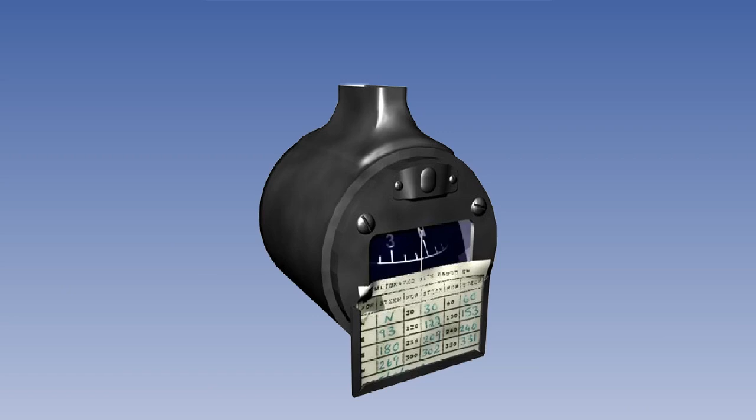The direct reading compass has 3 major limitations. These are: firstly, turning and acceleration errors. The compass cannot be read accurately during a turn.

Secondly, the magnetic sensing element - that is, the group of magnets on the vertical card - is contained within the instrument and has to be situated close to the pilot so that the card can be seen. Unfortunately, the cockpit area is close to sources of deviation, such as electric lights, electric motors, and ferrous metal.

Finally, it is a stand-alone system. The instrument is self-contained. It is not possible to take magnetic heading from it as an electrical or mechanical input into other equipment, such as those which display bearings from ground radio beacons, the autopilot, and the flight data recorder.

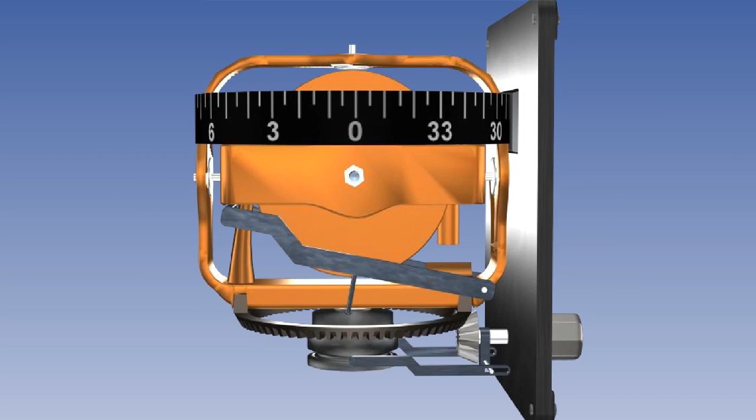The directional gyro indicator attempts to solve some of these problems by use of an air-driven or an electromechanical gyro. Turning and acceleration errors are eliminated, and outputs can be taken to other equipment, for instance, to display radio bearings. However, there is no magnetic input to the heading - no correction except by the pilot manually synchronizing to the direct reading compass at regular intervals.

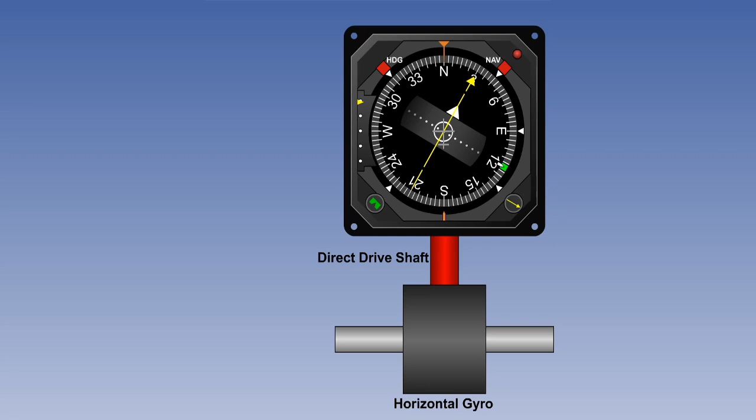What is required is a system which combines the best of both. The short-term rigidity of the gyro overcomes turning and acceleration errors. This needs to be combined with the longer-term monitoring of the Earth's magnetic field, so that if the gyro starts to drift, a servo system slaves it back to alignment with a magnetic input. Such a system is called a Gyro Magnetic Compass.

The Gyro Magnetic Compass is known by several names. It can be referred to as the Gyro Magnetic Compass, Remote Indicating Compass, Slaved Gyro Compass, or Magnetic Heading Reference System. They all mean the same thing.

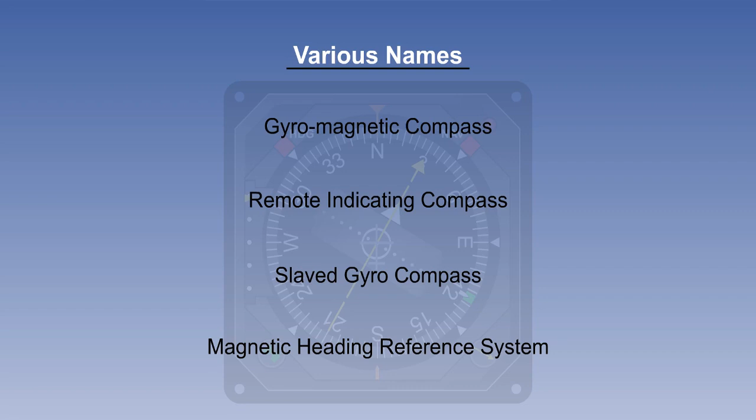A more modern version, which often includes other functions, such as the display of VHF omni-range, usually shortened to VOR, is known as the Horizontal Situation Indicator, or HSI.

The system comprises the following elements: a magnetic detector unit, also often known as a flux valve or a flux gate. Note that it is usually mounted on a wingtip or on top of the fin, and is therefore well removed from most of the sources of deviation.

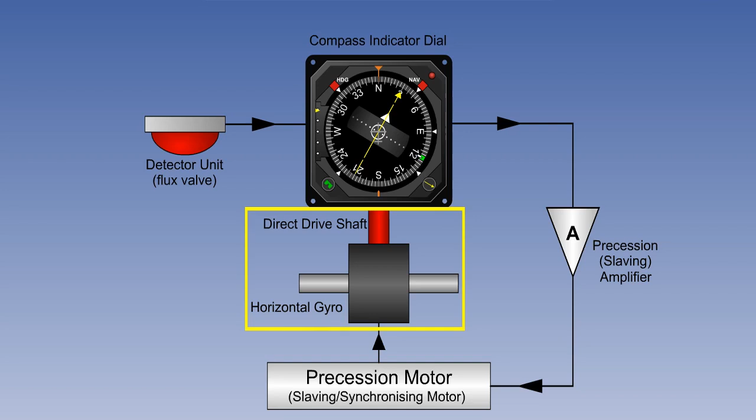A compass indicator dial - this is what most people refer to as the compass. A precession amplifier, which may also be known as a slaving amplifier. A precession motor, which may also be known as a slaving or synchronizing motor. And a horizontal gyro, similar in principle to the one used in the DGI.

In simple systems, the horizontal gyro is directly connected to the compass card of the indicator dial through 2 cogs, which change the rotary motion through 90 degrees. This is called a bevel gear, and it works like this. We are assuming our gyro is connected to the compass indicator dial by a bevel gear in the description which follows.

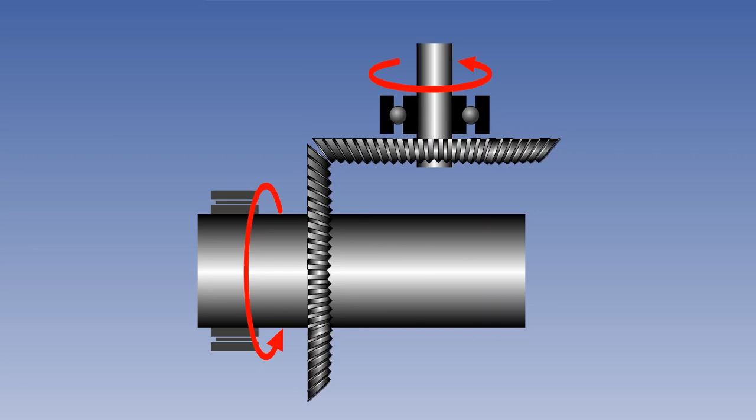The purpose of the detector unit, or flux valve, is to sense the Earth's magnetic field and reproduce it within the compass indicator. We will explain how this is done later. At this stage, we'll just say that magnetic heading has been detected electronically and passed to the indicator in the form of alternating current, or AC.

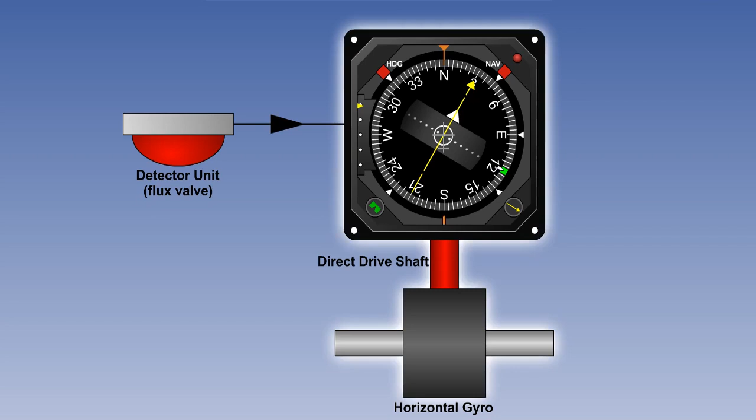We'll also assume that the compass has already been initially synchronized, in order to make the gyro drive shaft output the same as the flux valve. Again, we'll cover how this is done later.

In the compass indicator box, the flux valve output is compared with the position of the gyro drive shaft. This is the shaft which positions the compass card indicator, that is, the heading shown to the pilot. If the two are aligned, no further action takes place - the compass card is reading the right heading. We'll assume a steady heading, which gives a steady input from the flux valve.

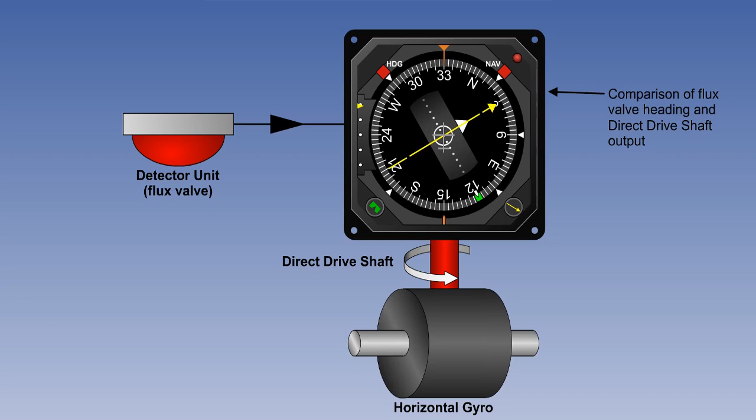From this point, any difference between the flux valve field and the gyro alignment would only arise if the gyro were to drift. If this happens, the drive shaft will not be in alignment with the flux valve field, and an AC error signal is generated and passed to the precession amplifier, where it is amplified, phase detected, and rectified to direct current, or DC.

The DC signal drives the precession motor, which turns the gyro. This gyro output is fed via the direct drive shaft to the HSI, for comparison with the flux valve signal. If the two are aligned, the compass is synchronized, and no further action takes place. If not, the error correction continues until the compass is synchronized.

We now have a system in which if the gyro drifts away from the steady flux valve heading, it is brought back again by the precession amplifier and motor.

We have explained the normal operation in terms of the gyro, which has a tendency to drift, being slaved to the magnetic detector unit. However, there is also a smoothing of the signal the other way, because the magnetic flux valve signal itself is subject to short-term fluctuations, and the effect of these is reduced by the gyro.

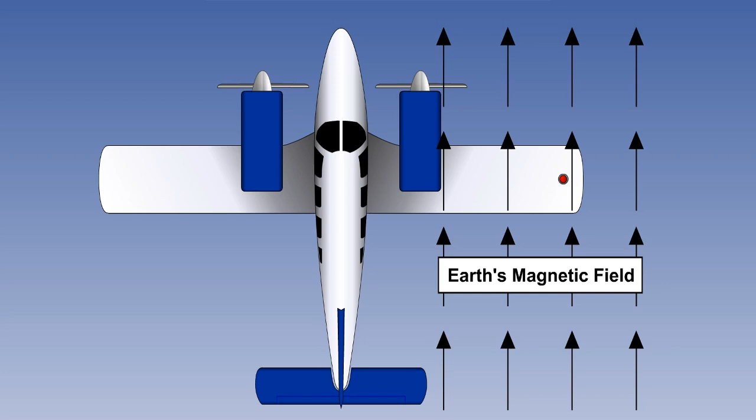Let's see how. The magnetic field detected by the flux valve is generally stable over periods of tens of minutes or of hours, but it can fluctuate for short periods of up to 2 or 3 minutes, particularly during accelerations and turns.

Suppose that, for some reason, the flux valve signal has temporarily introduced a small error. This will be compared with the gyro signal, and the error will be detected. The system has no way of telling whether the error is in the flux valve or the gyro, and so the error signal will start to drive the gyro to follow the flux valve.

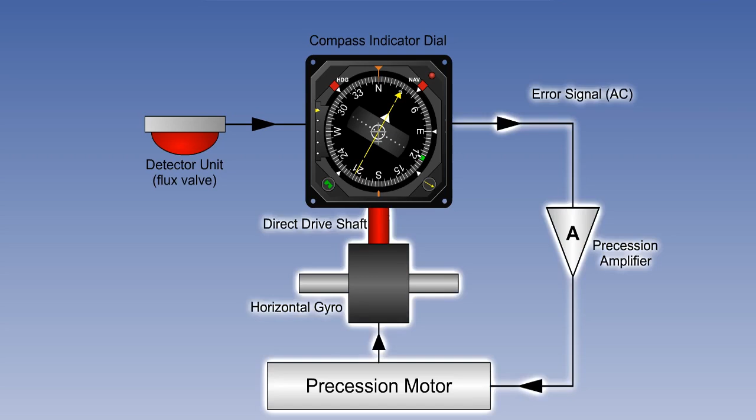However, the precession motor is designed to take the error out slowly, correcting the gyro at a rate of only 3 degrees a minute, or thereabouts. The gyro will therefore respond slowly to this short-term error. The error may well disappear before the gyro has turned significantly. If not, as soon as the flux valve signal is correct again, the gyro will follow it back to the correct value. So, because of the choice of precession rate of the motor, any small short-term flux valve errors are damped out by the gyro's slow response.

We therefore have a system which combines the best of both sources: the short-term rigidity of the gyro and the longer-term monitoring of the Earth's magnetic field.

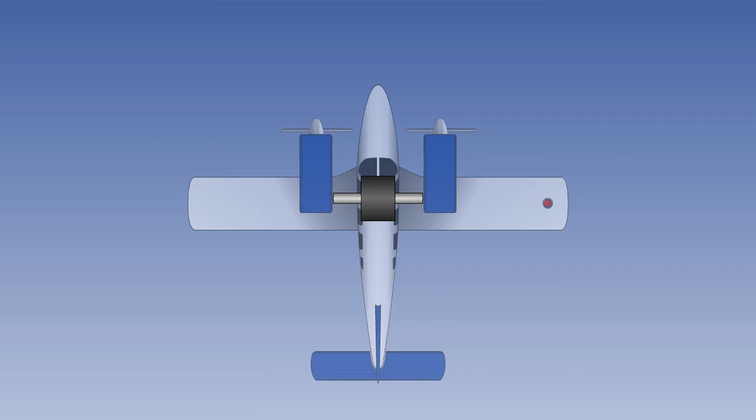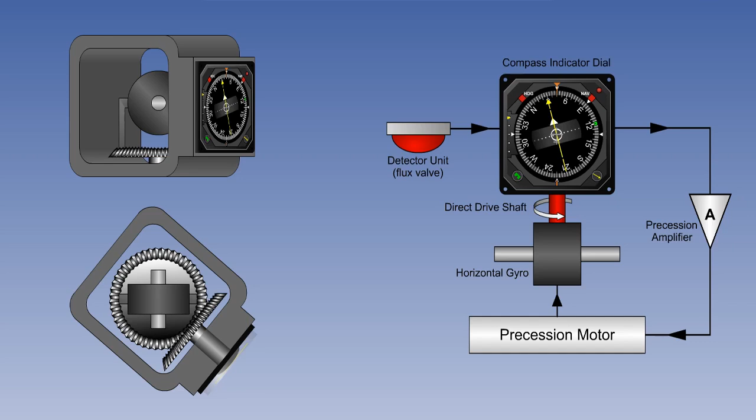Now consider what happens in a turn. We will assume initially that the gyro does not drift during the turn, which may well be the case, because even during a full 360-degree orbit at the standard rate 1, the turn will only take 2 minutes. The aircraft turns, but the gyro, having rigidity, does not. This gives relative rotation between the horizontal gyro and the instrument case, and so operation of the bevel gear causes the direct drive shaft to rotate, changing the heading indication on the compass card.

However, at the same time, the heading sensed by the flux valve, which is being passed to the drive shaft for comparison, is changing at the same rate. Therefore, no error signal is generated, and the compass should remain synchronized during the turn.

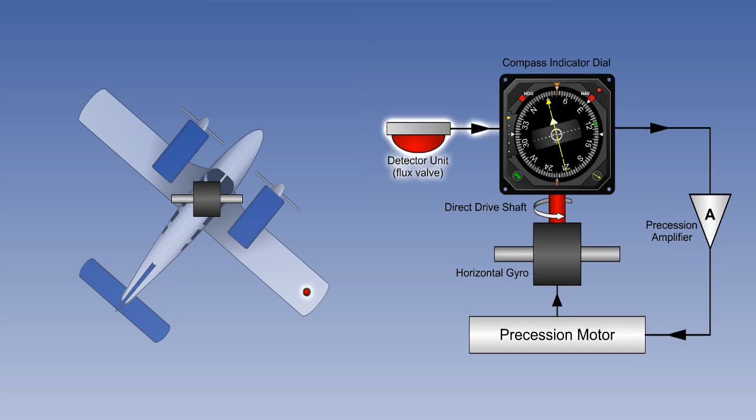If, in fact, there is some gyro drift during the turn, on completion of the turn there will be a small error signal. This will be taken out, as described in the previous scene. The use of a slow precession rate gives us a problem at startup.

On initial switch on, the alignment that the gyro takes up is random, and is unlikely to be in synchronization with the Earth's magnetic field. Therefore, an error signal is detected. The problem is that the precession motor's normal correction rate is designed to be only 3 degrees per minute, in order to smooth out short-term fluctuations, and if the gyro happened to be 90 degrees out, it would take 30 minutes to synchronize, which is obviously unacceptable.

The solution is to have a rapid synchronization facility. This can either be a mechanical clutch operated by the pilot, as in the DGI, or, in later compasses, a high-gain mode for the precession amplifier, similar in principle to rapid erection in the electric artificial horizon. This is operated by a 2-position switch, spring-loaded to the normal position, which has to be held against the spring for rapid alignment.

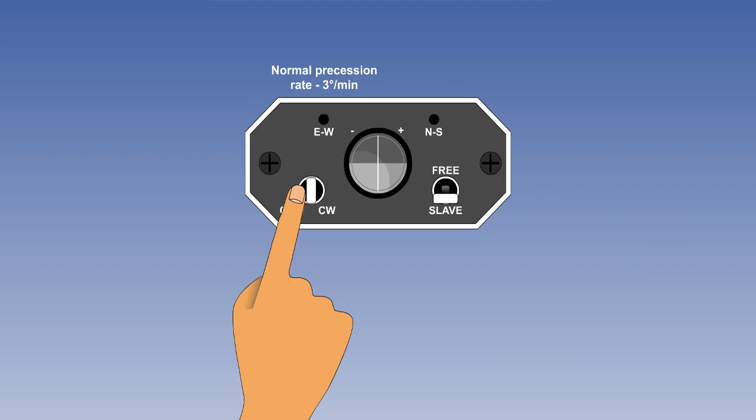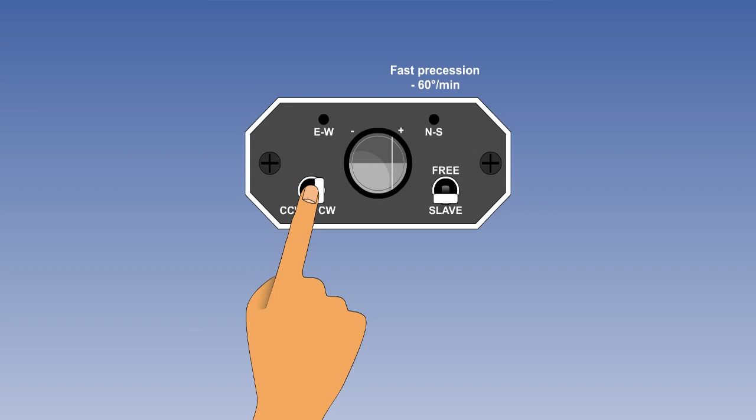Operation of this switch increases the precession motor's correction rate, so that synchronization takes only a few seconds. More modern compasses are even more automatic. If a large error is detected, fast precession takes place at typically 60 degrees per minute until the error is 0. Then the system automatically reverts to the slow, smooth precession rate of typically 3 degrees a minute.

We therefore have to modify our original block schematic to include the rapid synchronization facility.

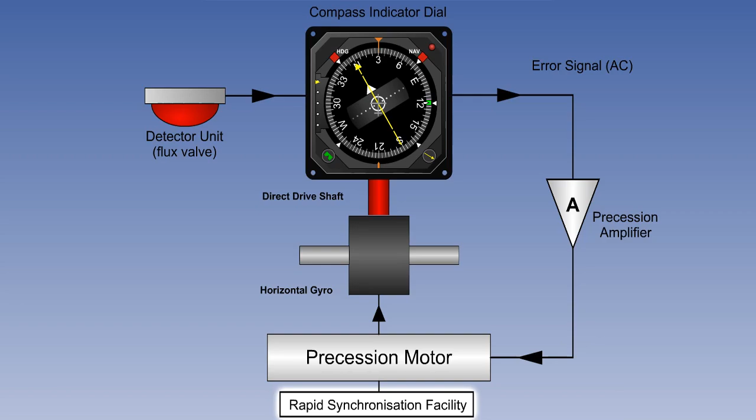We still have 2 more lessons to come on the Gyro Magnetic Compass, one on the flux valve and the other on the remaining components. But let's summarize what we've covered so far.

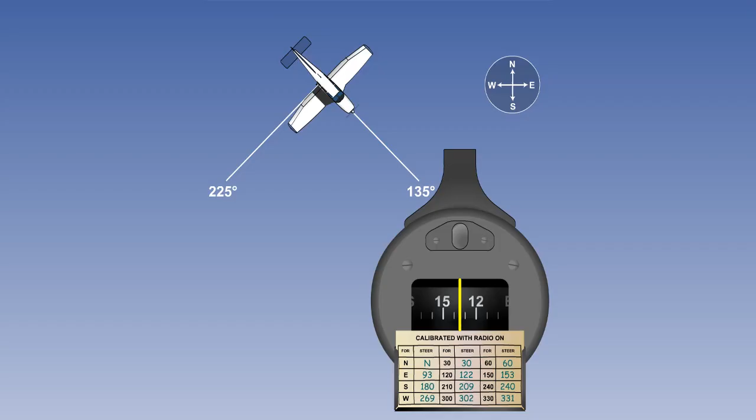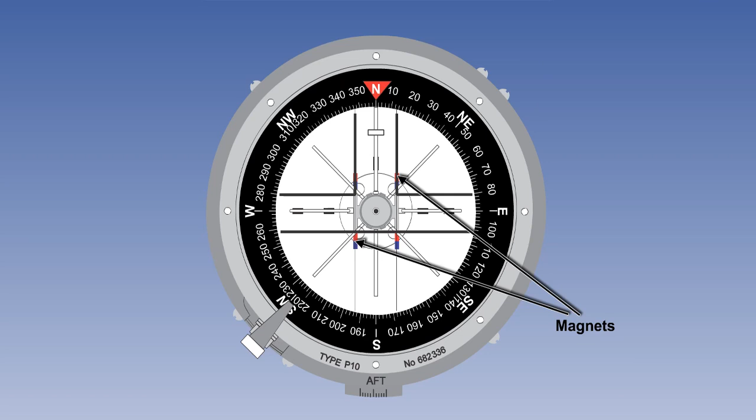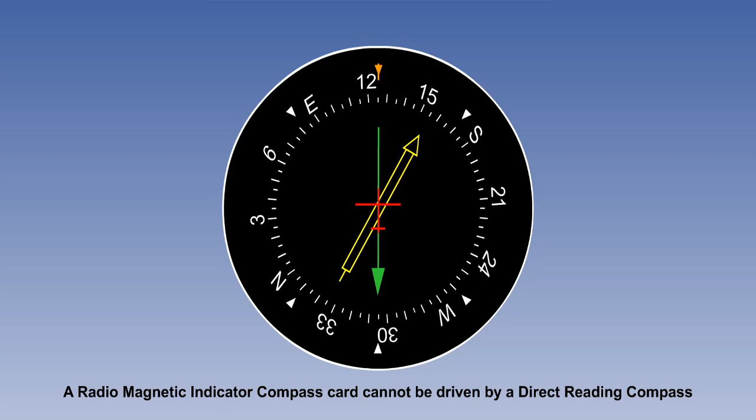The direct reading compass suffers from turning and acceleration errors, is situated close to the pilot, but also to sources of deviation, such as electric lights, electric motors, and ferrous metal, and is a self-contained instrument. It is not possible to take magnetic heading from it as an electrical or mechanical input into other instruments.

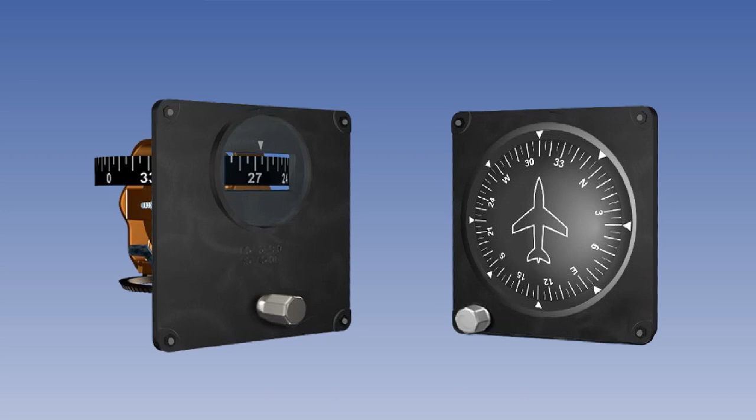In the directional gyro indicator, turning and acceleration errors are eliminated, and outputs can be taken to other equipment. But there is no magnetic monitoring.

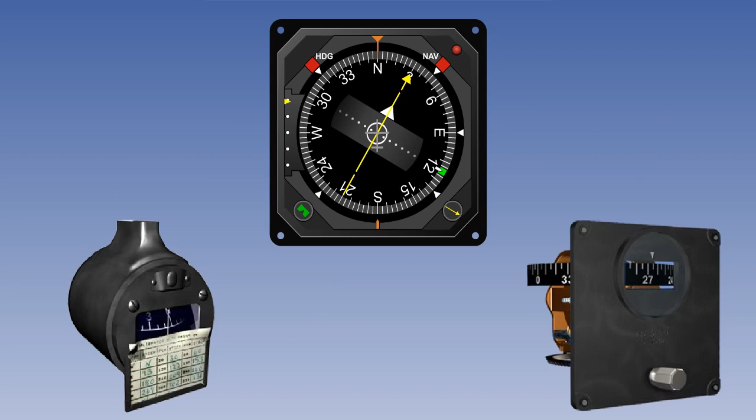We therefore have a system which combines the best of both sources: the short-term rigidity of the gyro and the longer-term monitoring of the Earth's magnetic field. We looked at all the basic components.

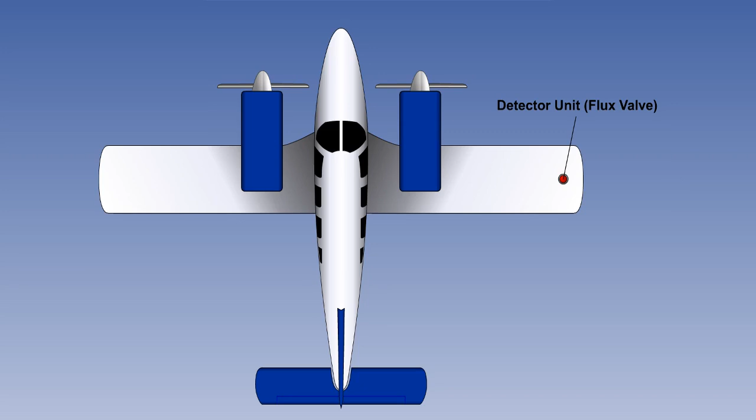This system has several advantages over the direct reading compass and DGI. Firstly, the flux valve is usually mounted on a wingtip or on top of the fin, and is therefore well removed from most of the sources of deviation. On initial switch on, the gyro is brought into alignment with the signal detected at the flux valve.

From then on, the outputs of the gyro and the flux valve are compared. If there is any error, the gyro is precessed into alignment with the flux valve by the precession amplifier and precession motor. This overcomes the normal gyro drift.

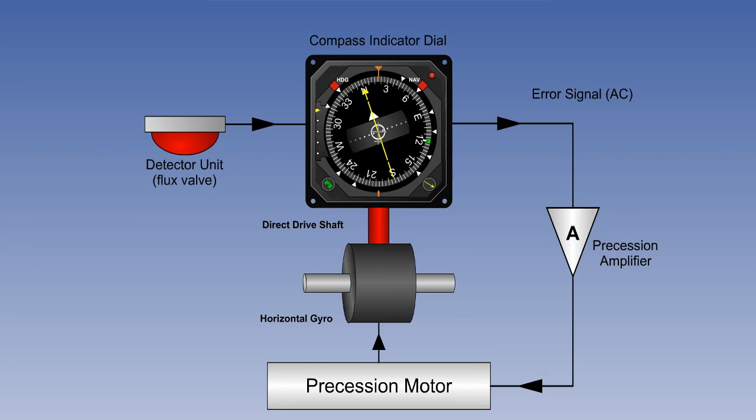The flux valve on its own would still suffer from turning and acceleration errors, but sending the signal via the gyro gives stability and rigidity, because the precession motor applies corrections to the drive shaft at the rate of approximately only 3 degrees per minute.

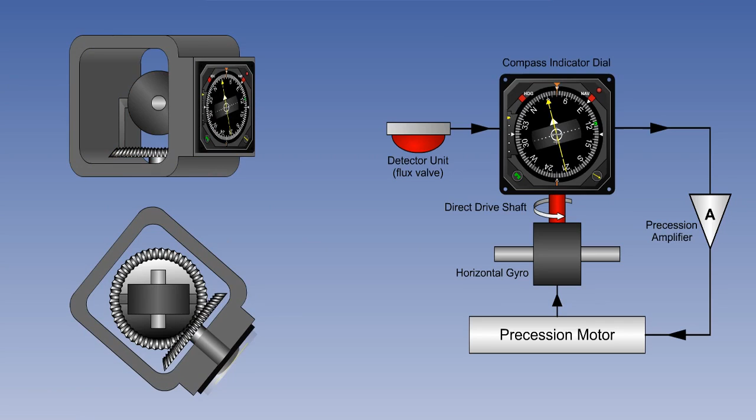In a turn, both the flux valve and the gyro shaft turn at the same rate, so there should be no significant error at the end of the turn. If any error is generated in the turn, it will be small, and is precessed out in the normal way after completion of the turn.